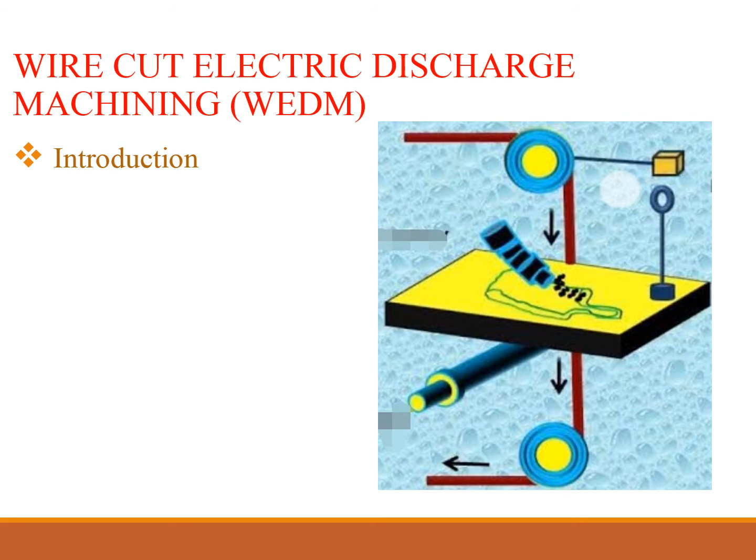Today we will discuss wire cut electric discharge machine. We will cover the introduction, principle of working, setup of wire cut electric discharge machine, process parameters, advantages, disadvantages, and applications of wire cut electric discharge machine.

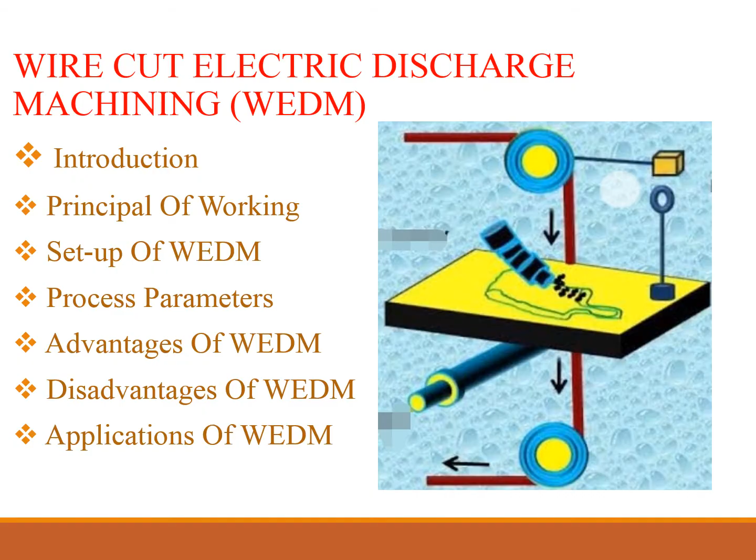Introduction. The basic principle of metal removal in wire cut electric discharge machine is the same as that of electric discharge machine. It employs electrical energy to remove metal from the workpiece without touching it. The process can be used only when the workpiece to be cut has a through hole in it, or the cut is to be taken from the outer edge into the workpiece as shown in figure.

It uses a wire of about 0.3 mm diameter as a tool. The wire is made up of copper or tungsten. Deionized water is used as a dielectric fluid.

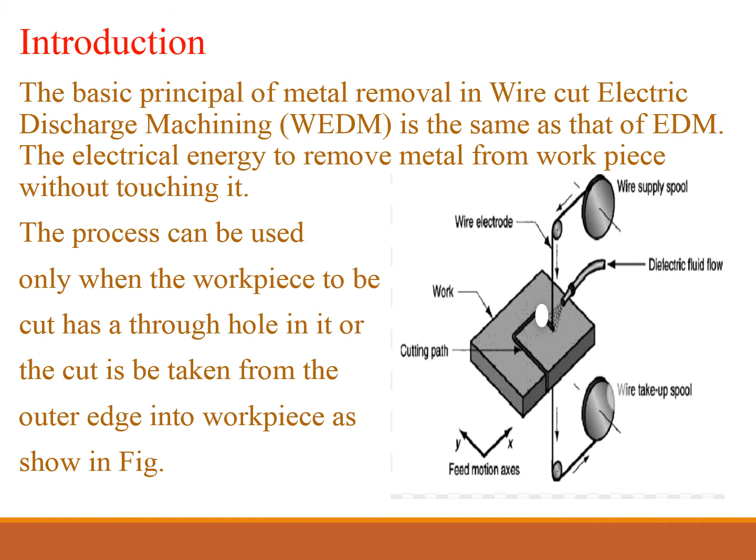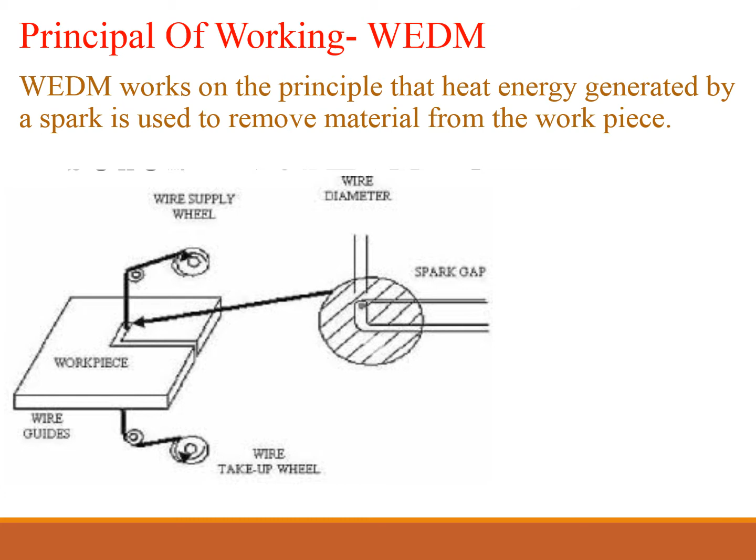Principle of working of wire cut electric discharge machine. It works on the principle that the heat energy generated by a spark is used to remove the material from the workpiece. It uses a wire of about 0.3 mm diameter as an electrode or tool. A constant gap of 0.5 mm is maintained between the wire and workpiece with the help of a control system.

The wire is continuously moved at constant speed through the workpiece. A dielectric fluid is constantly flushed in the area of machining. When the machine tool is switched on, sparks are generated between the tool and workpiece. When the spark comes in contact with the dielectric fluid in the gap, the fluid gets ionized and allows current to flow between the tool and workpiece.

Heat generated during the sparking process results in melting of the workpiece. These melted particles of the metal are then driven away by the dielectric fluid. In order to create the desired shape on the workpiece, the table motions are controlled by the positioning unit.

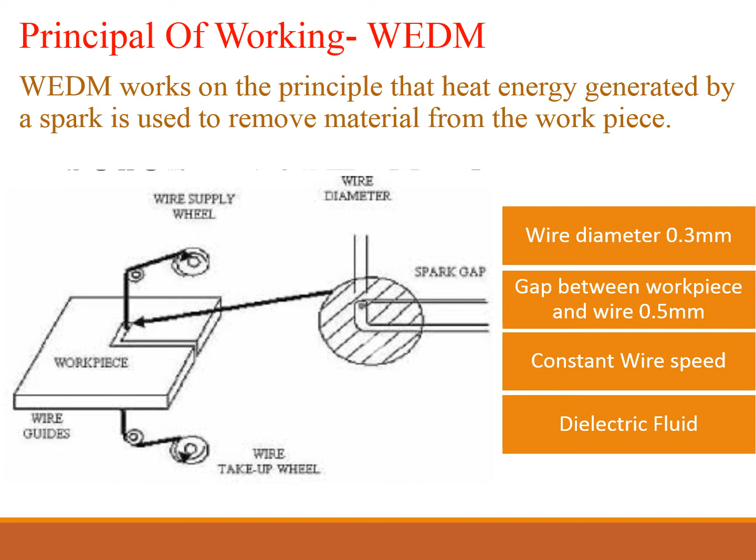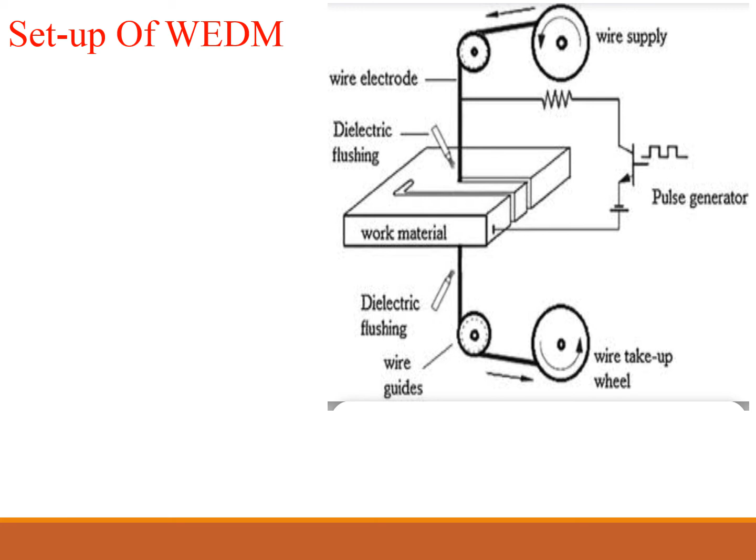The setup of wire cut electric discharge machine as shown in figure: first, power supply system; second, dielectric system; third, a CNC control system; fourth, wire drive system.

First we will see the power supply system. The workpiece is mounted on the table. The tool is connected to the negative terminal so that it becomes a cathode, while the workpiece is connected to the positive terminal and becomes an anode. The tool and workpiece are connected to the DC supply.

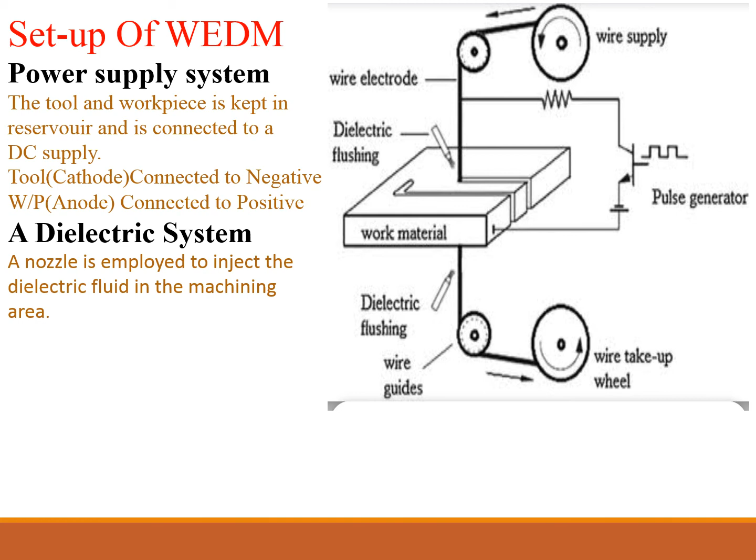Second, dielectric system. Deionized water is used as a dielectric fluid in wire cut electric discharge machine. It gives high metal removal rate as well as better surface finish. A nozzle is employed to inject the dielectric fluid in the machining area. Both the workpiece and the wire are constantly flushed with dielectric fluid at the area being machined. The dielectric also serves as a coolant.

Next, a CNC control system. A CNC control system is used for the movement of the table. The table can also be moved in both directions simultaneously for taking controlled cuts.

Next, wire drive system. This system performs three functions: first, to feed the fresh wire for machining; second, to take up the used wire; third, to keep the wire under appropriate tension so that it moves in the machining area as a straight wire.

The wire is used only once, because due to sparking which takes place at the surface of the wire, the wire no longer remains round. During operation, when the supply is switched on, the dielectric fluid gets ionized and results in melting of the workpiece.

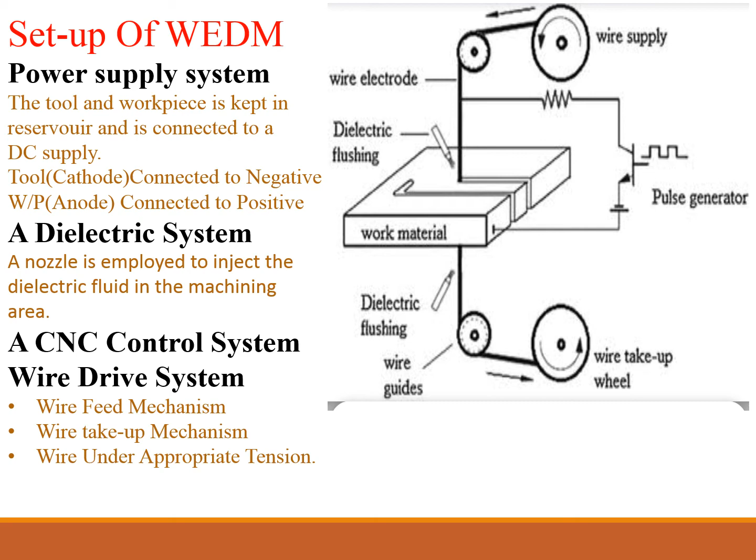Controlling parameters. The main controlling parameters in wire cut electric discharge machine are: first, discharge current; second, pulse duration; third, pulse frequency; fourth, cutting rate; fifth, wire tension; sixth, dielectric flow. We will see them one by one.

First, discharge current. Material removal rate depends on current. Increasing the current increases the crater depth up to a certain value, beyond which increasing this parameter yields a smoother surface.

Pulse duration. Increase in pulse duration results in more removal of material and increased surface roughness. Pulse frequency. Material removal rate increases with pulse frequency, resulting in reduced crater size or better surface finish.

Next, cutting rate. The wire speed is in the range of 2.5 to 150 mm per second. The cutting rate depends upon the thickness of the workpiece. The maximum depth of material that can be machined is about 90 mm. An average machining rate of 10 to 15 mm square per minute is generally achieved.

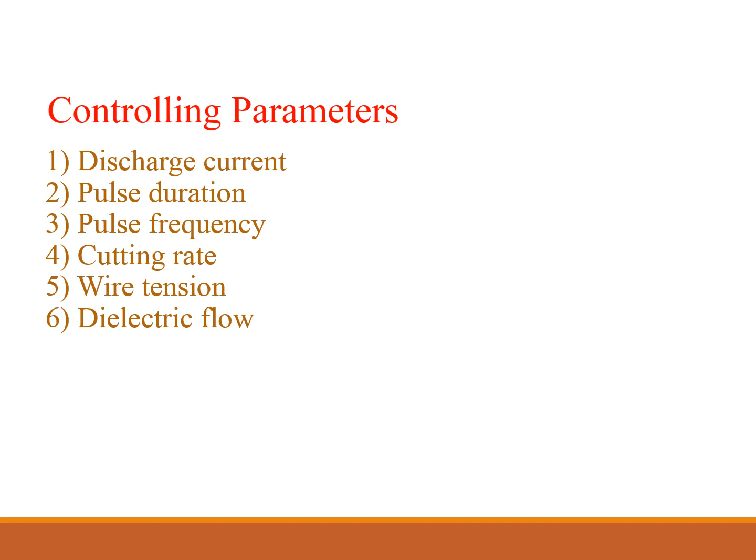Next, dielectric flow. A nozzle is employed to inject the dielectric fluid in the machining area. The supply of dielectric should be continuous and enough to allow the sparking. The dielectric fluid can be reused but only after filtration.

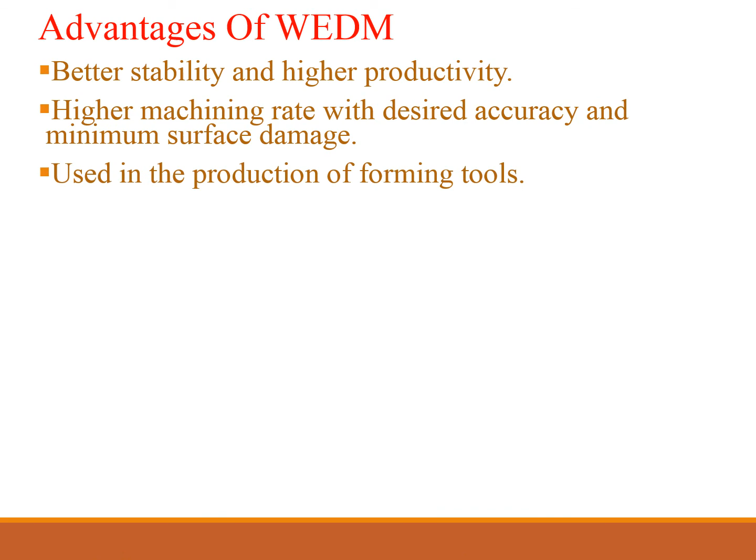Advantages of wire cut electric discharge machine: better stability and higher productivity, higher machining rate with desired accuracy and minimum surface damage, used in production of forming tools to produce plastic molding, die casting, forging dies, etc.

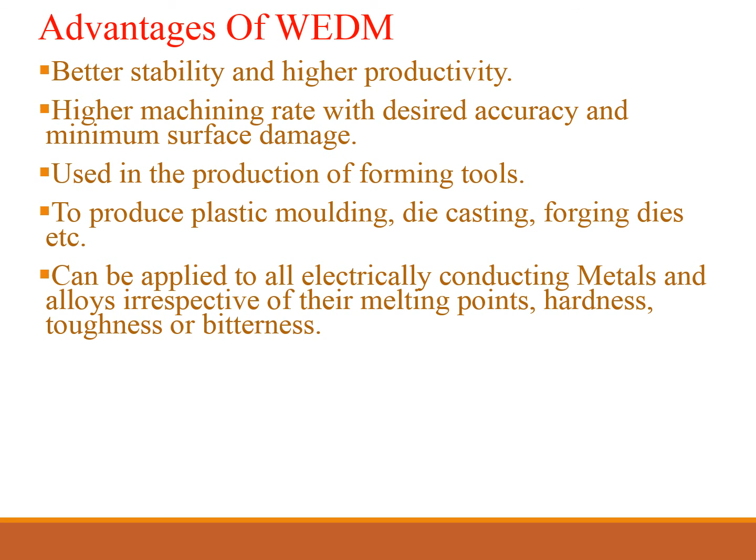Can be applied to all electrically conducting metals and alloys irrespective of their melting point, hardness, toughness or brittleness. Straight holes can be produced to close tolerance. Very sharp angles can be cut with almost no radius.

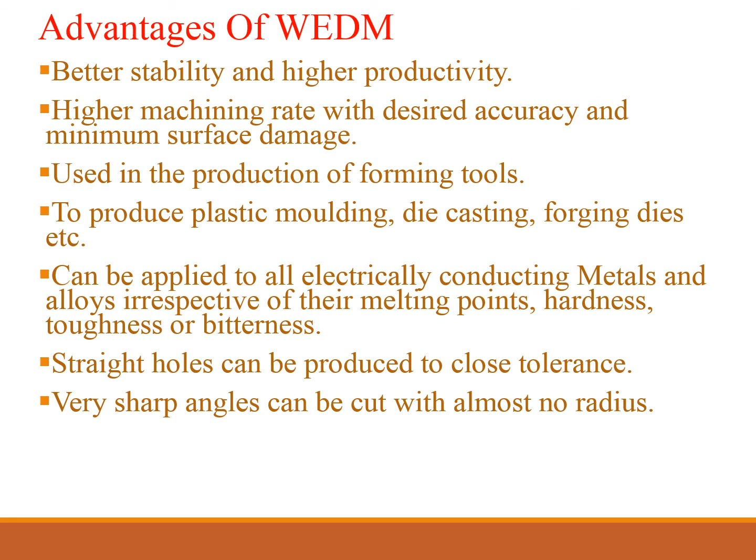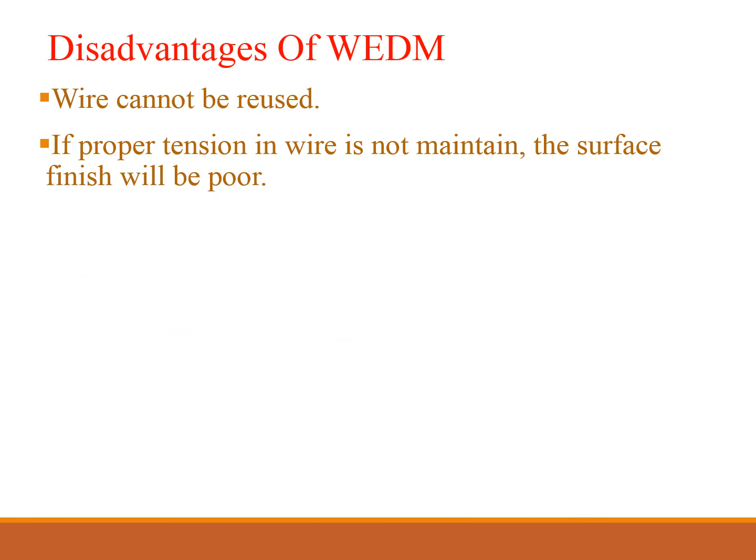Disadvantages of wire cut electric discharge machine: wire cannot be reused. If proper tension in the wire is not maintained, the surface finish will be poor.

Residual stresses are induced in the workpiece during machining. The maximum depth of workpiece which can be machined is around 90 mm.

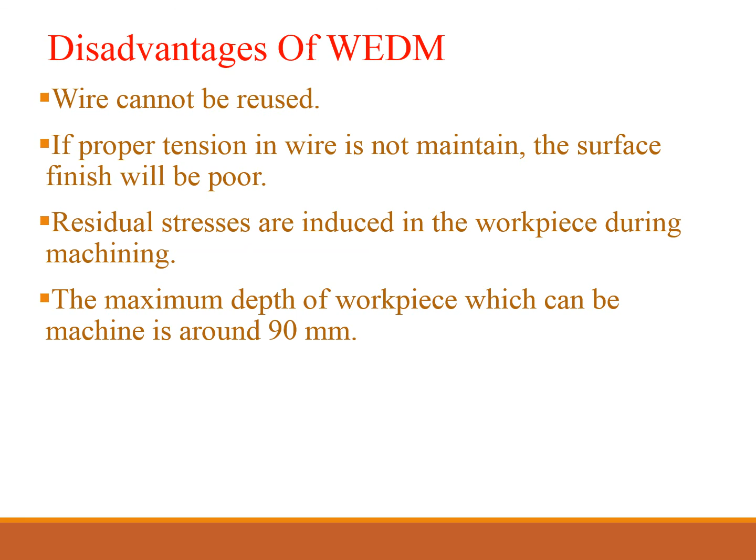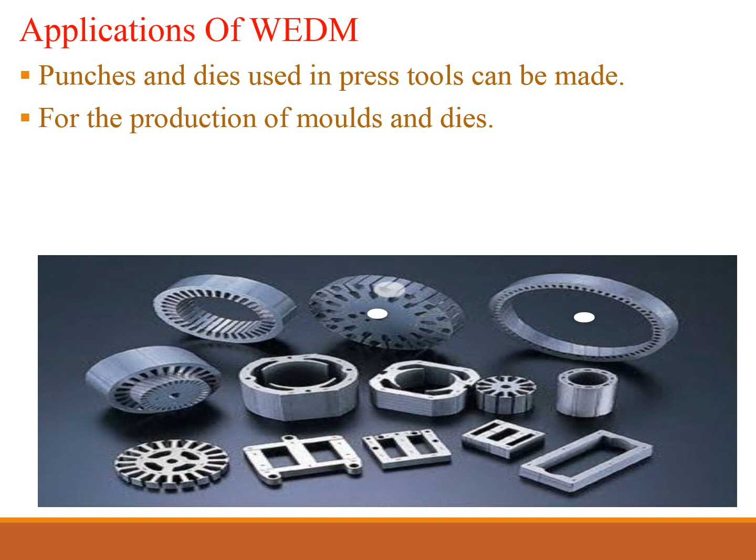Application of wire cut electric discharge machine. Punches and dies used in press tools can be made for the production of molds and dies used to cut out complex contours in electrically conductive workpieces.

Cylindrical pins as small as 5 mm in diameter can be machined. Thank you.